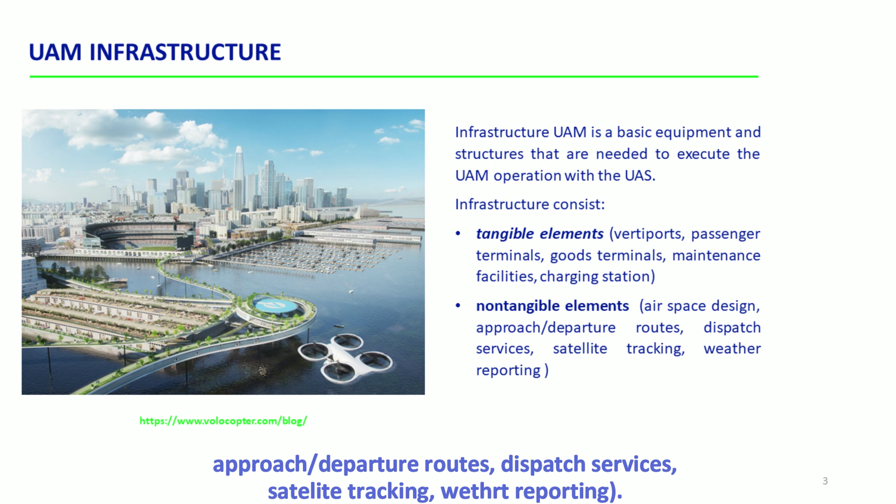A UAM operation needs infrastructure for taking off, flight, landing, servicing and preparation for the next flight. Operations to deliver goods also need infrastructure to deliver the goods. Operations to transport people also need infrastructure to facilitate the movements of these people and their luggage. The servicing of the UAS needs facilities to perform post-flight and pre-flight inspections, maintenance, and for refueling of the aircraft or for reloading the batteries of the aircraft's propulsion.

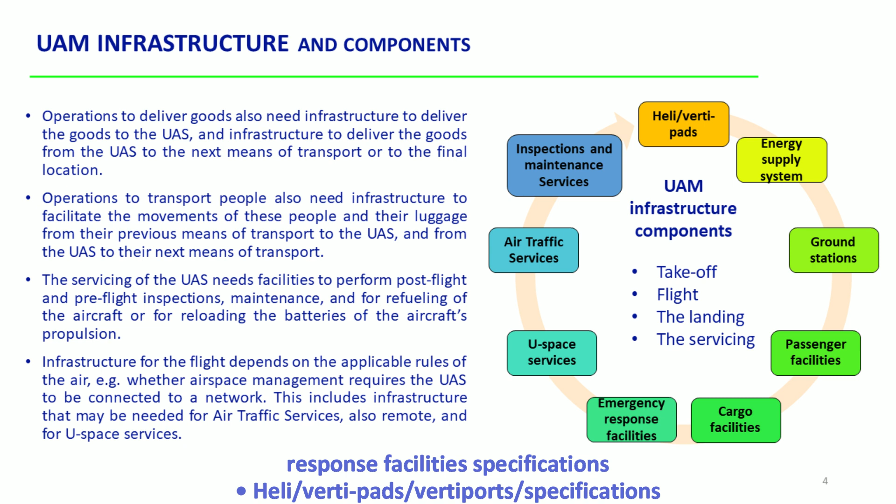Infrastructure for the flight depends on the applicable rules of the air. This includes infrastructure that may be needed for air traffic services, also remote, and for U-space services. In general, UAM infrastructure components are as follows: ground station specifications, flight specifications, UAM, UTM, U-space, ATM, passenger and emergency response facilities specifications, heli vertipads, and vertiports specifications.

The urban air mobility and its future integration into urban transportation. UAM is a novel concept based on the use of vertical takeoff and landing vehicles for aerial transportation of people in urban and peri-urban environments, but its integration into cities and within existing transportation modes needs a completely new approach. Although it will take some time for the technology to be fully in service, it is important to prepare, supporting cities with recommendations to allow UAM integration into everyday life equal to surface transport.

UAM needs to be integrated into the urban context. To do that, a series of actions will be necessary to adapt the cities and allow them to accommodate this new mode of urban air transport.

The operational limits, or barriers, to the development of UAM can be divided into three macro categories: 1. Ground infrastructural limitations - ground infrastructures necessary for passengers embarking, disembarking, and flight and landing operations. 2. Technological limitations - propulsion, capacities, covered distance, and so on. 3. Social limitations.

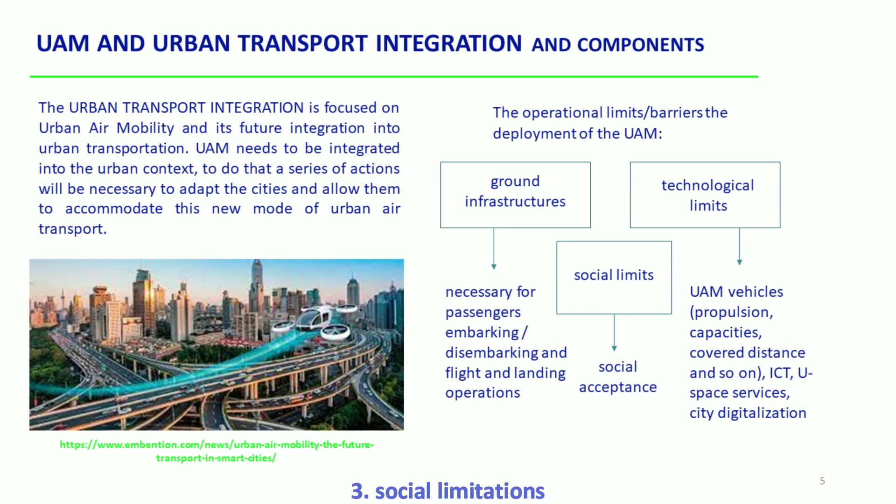Within the technological limits, in addition to the enabling vehicles, there are all aspects related to ICT and U-space services. The ICT domain-related applications that can be used to support UAM and multimodal transport include Internet of Things, communication technologies, big data processing, and the smart cities concept.

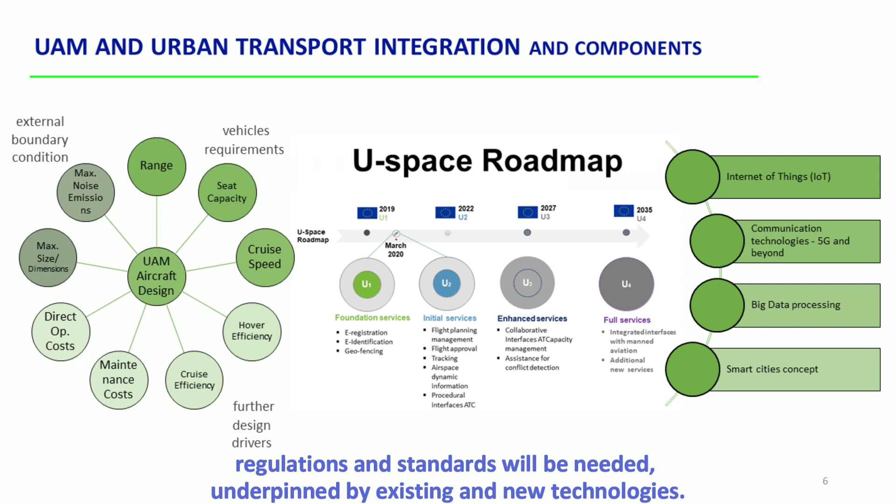Another important aspect to ensure the integration of UAM in the urban context of the city and with all existing transport modes are certainly the U-space services, which in their final phase will need the whole environment to integrate safely with manned aviation and air traffic control. As this important and growing domain evolves, new operational concepts, regulations and standards will be needed, underpinned by existing and new technologies.

Drones could significantly impact the natural environment. There are many important aspects to consider when implementing unmanned vehicles in cities. Environmental issues constitute one of the more important topics, so many possible events and undesirable effects should also be taken into account so as not to disturb the natural environment in which we live.

Wildlife protection is one of the main concerns of European citizens when considering the potential large number of aircraft flying at lower levels of the atmosphere. Many aspects are important to consider when implementing unmanned vehicles in cities: noise, impact on wildlife and birds, disruption of habitat, impact on flora, noise pollution, greenhouse gas emissions, visual pollution and energy consumption. Environmental issues constitute one of the more important topics, so many possible events and undesirable effects should also be taken into account so as not to disturb our natural environment. Urban air mobility's impact on the natural environment includes drone impact on wildlife, disruption of habitat, and impact on flora.

As regards impact on birds, we have provoking attacks, scattering, effects on birds' reproduction and survival, collision during provoking attacks, mid-air collisions, and interrupting feeding.

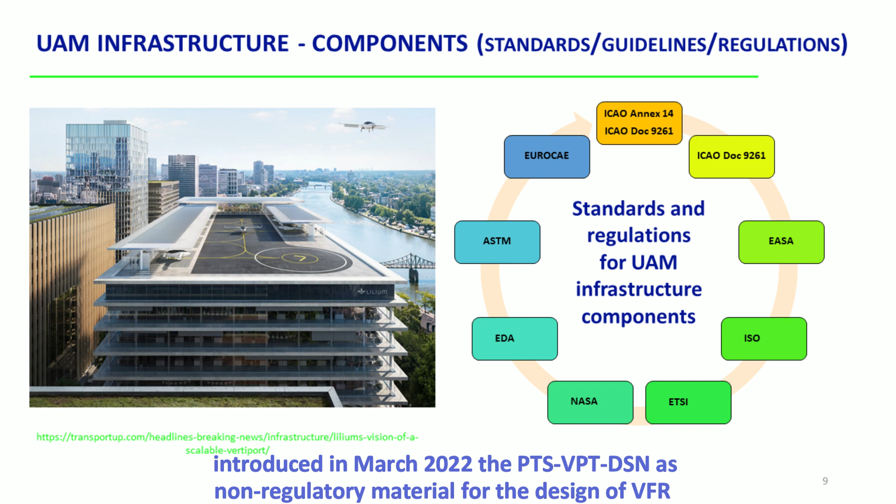The EU Aviation Safety Agency, EASA, is developing rules for UAM facilities, i.e. vertiports, in 2 stages. In the first stage, EASA introduced in March 2022 the PTS-VPT-DSN as non-regulatory material for the design of VFR vertiports or parts thereof, applicable for the operation of manned VTOL-capable aircraft certified in the enhanced category.

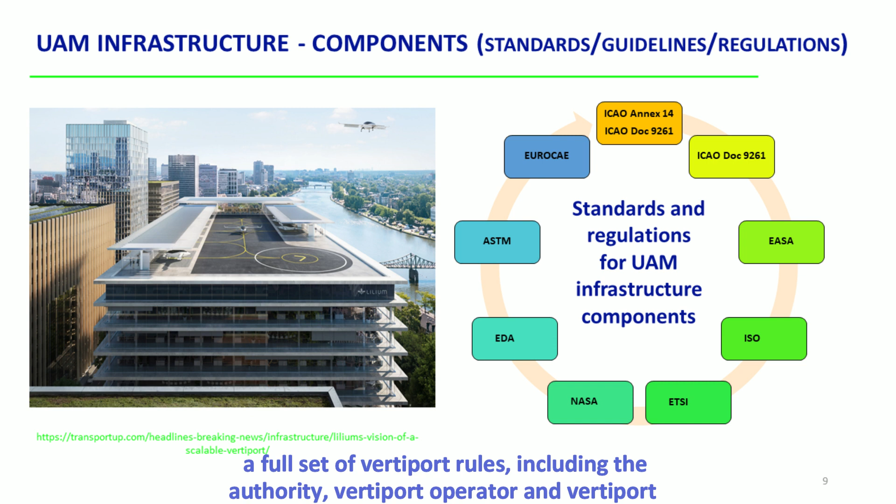In the second stage, the rules will cover a full set of vertiport rules, including the authority, vertiport operator, and vertiport operation requirements, along with the certification specifications (CSs) and guidance material (GM) for vertiport design and certification.

Heli-Vertipad's Vertiport Specifications Section 9.6 covers Refueling Safety Requirements, including fire extinguishing equipment.

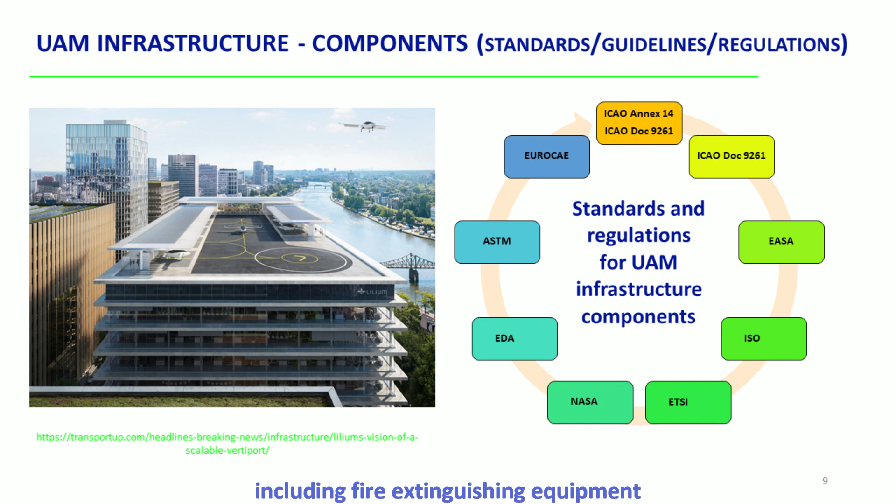Regarding UAM, UTM, USpace and ATM, the Global UTM Association released a document describing an overall high-level unmanned aircraft systems traffic management (UTM) architecture for all types of UAS operations: VLOS, EVLOS, BVLOS, piloted, RPAS, and autonomous.

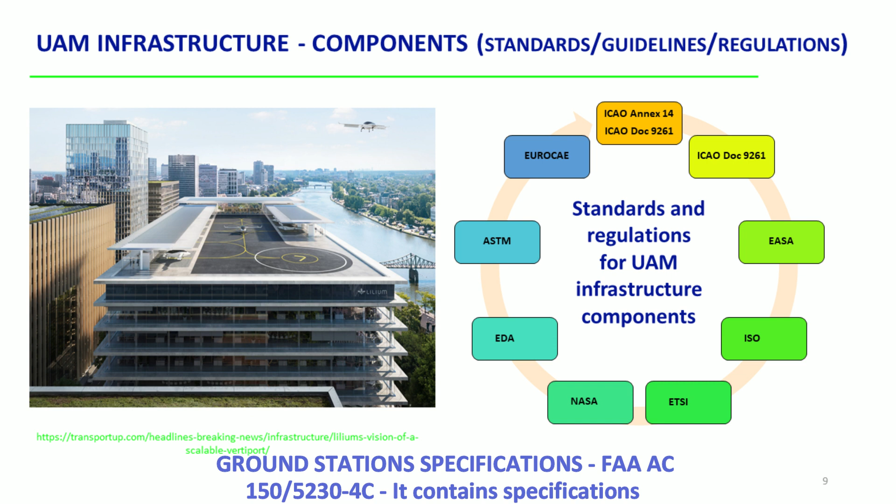Ground Station Specifications: FAA AC 150/5230-4C contains specifications and guidance for the storage, handling, and dispensing of aviation fuel on airports.

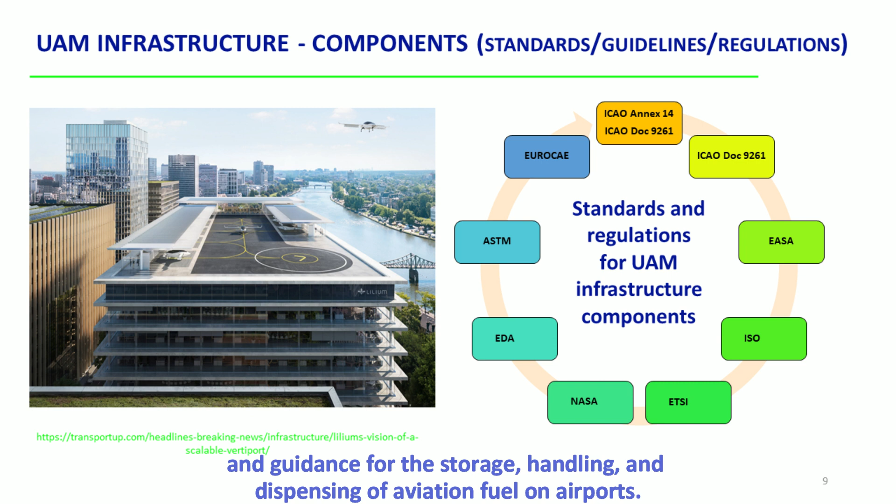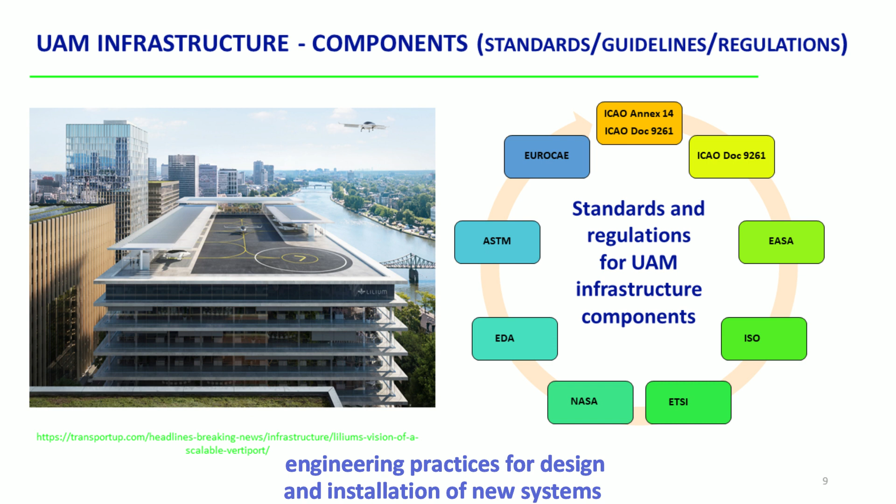Lighting Specifications: ICAO Doc 9157, Guide to the recommended electrical engineering practices for design and installation of new systems and the modification of existing systems of aerodrome fixed lighting.

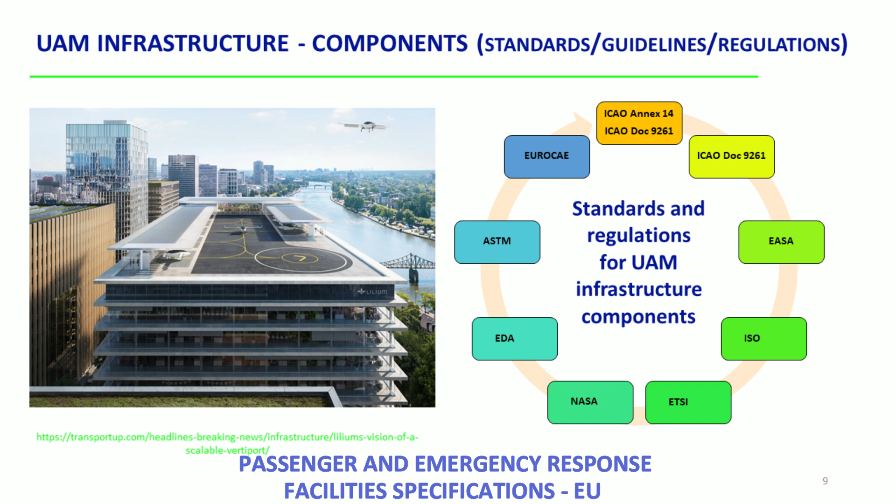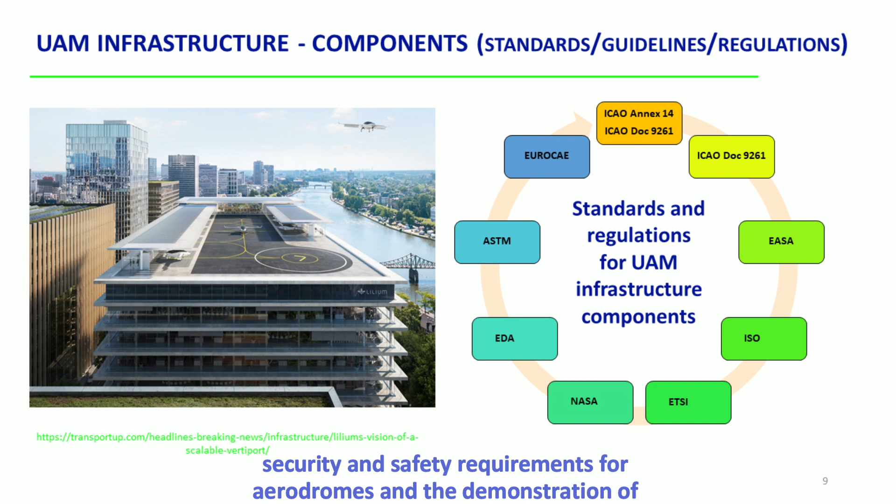Passenger and Emergency Response Facilities Specifications: EU Regulation 139/2014 on aerodromes shows the security and safety requirements for aerodromes and the demonstration of procedures to guarantee the passenger safety requirements to screen passengers.

The EU Aviation Safety Agency, EASA, is developing rules for UAM facilities, i.e. vertiports, in 2 stages. In the first stage, EASA introduced in March 2022 the PTS-VPT-DSN as non-regulatory material for the design of VFR vertiports or parts thereof, applicable for the operation of manned VTOL-capable aircraft certified in the enhanced category.

In the second stage, the rules will cover a full set of vertiport rules, including the authority, vertiport operator, and vertiport operation requirements, along with the certification specifications (CSs) and guidance material (GM) for vertiport design and certification.

Some consideration could be given to ensuring an efficient integration of UAM into existing transport systems, by way of considering data exchange standards between operators. It is essential that there is a single standard of data exchange between different transport systems and the different operators.

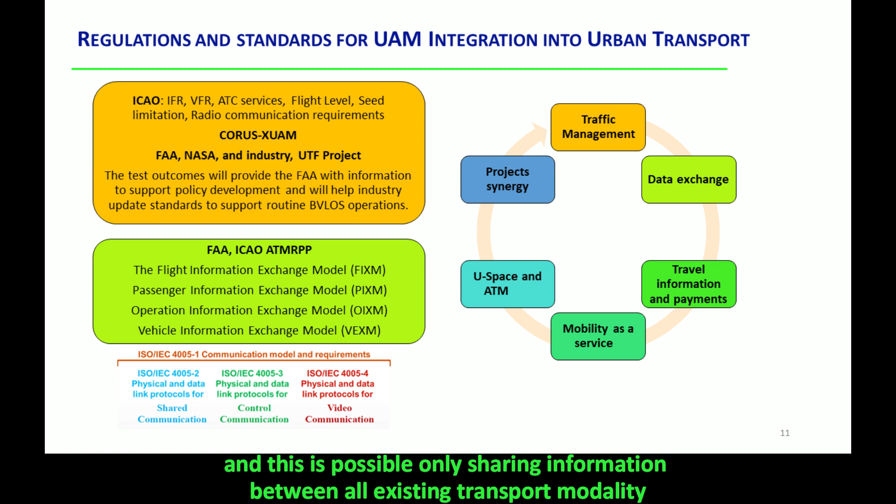Second, all information should be shared between operators and transportation service providers. Third, there should be availability of alternatives in the round trip to overcome any disruptive scenario that may arise during the journey, and this is possible only by sharing information between all existing transport modalities.

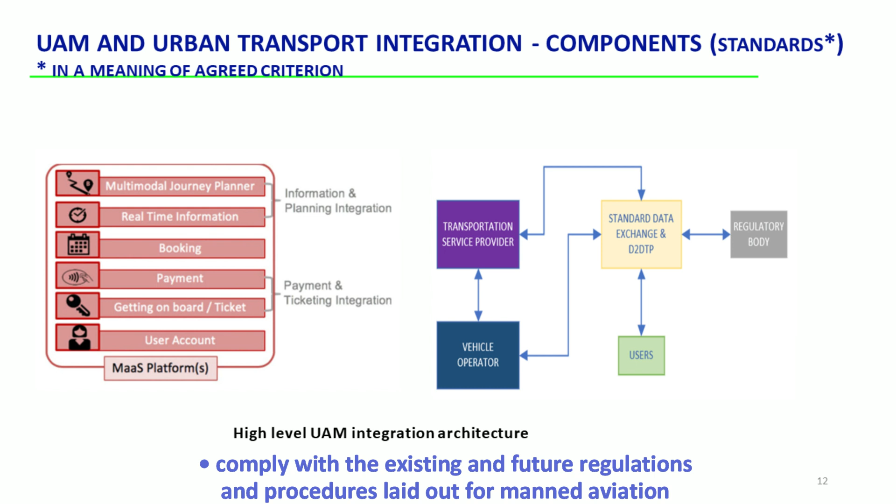ICAO has specified 4 main requirements for UAS ATM integration: it shall not imply a significant impact on current users or the airspace; it shall comply with existing and future regulations and procedures laid out for manned aviation; it shall not compromise existing aviation safety levels nor increase risk more than an equivalent increase in manned aviation would; and it shall be conducted in the same way as those of manned aircraft, and shall be seen as equivalent by ATC and other airspace users.

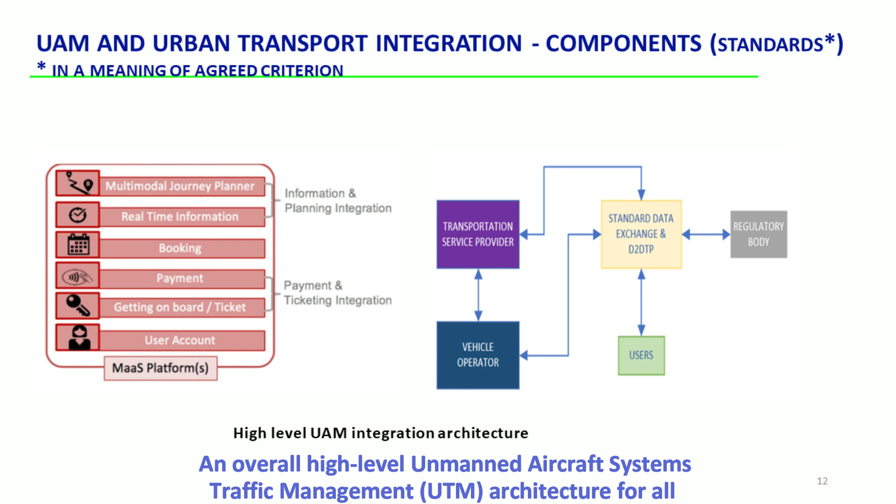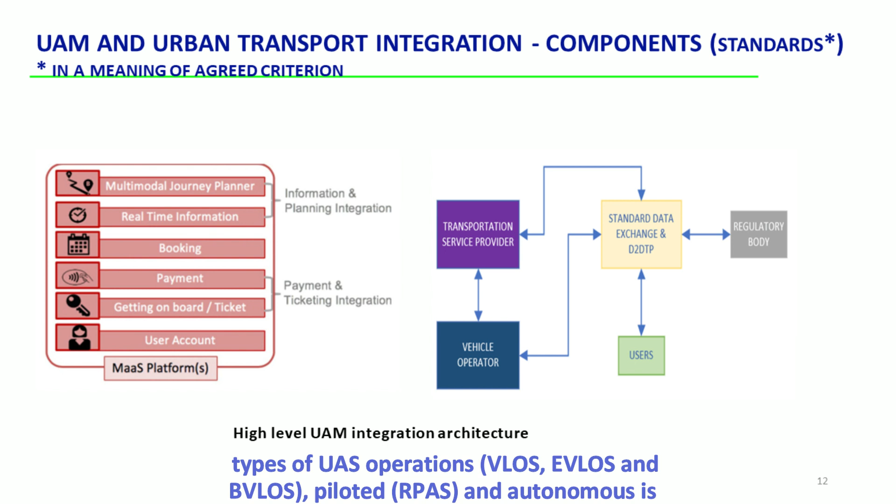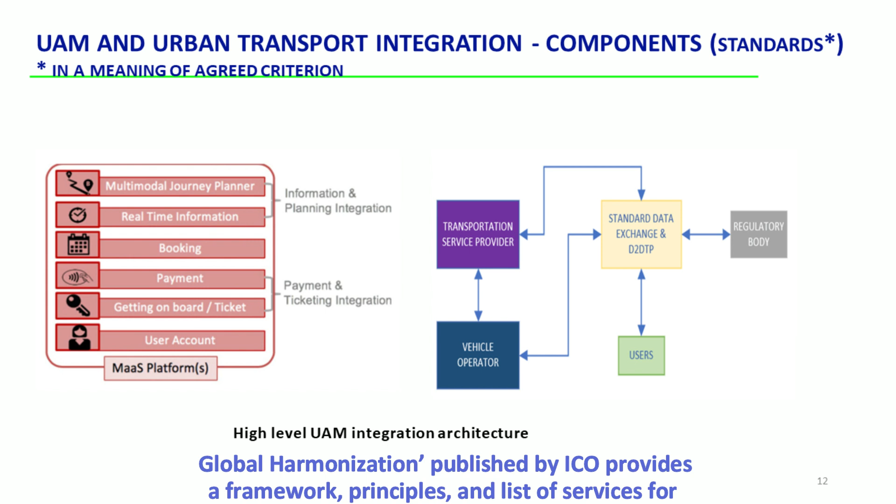An overall high-level unmanned aircraft systems traffic management (UTM) architecture for all types of UAS operations - VLOS, EVLOS, BVLOS, piloted, RPAS and autonomous - is described by the Global UTM Association (GUTMA): a common framework with core principles for global harmonization. Published by ICAO, it provides a framework, principles and list of services for a typical UTM system adopted by many member states.

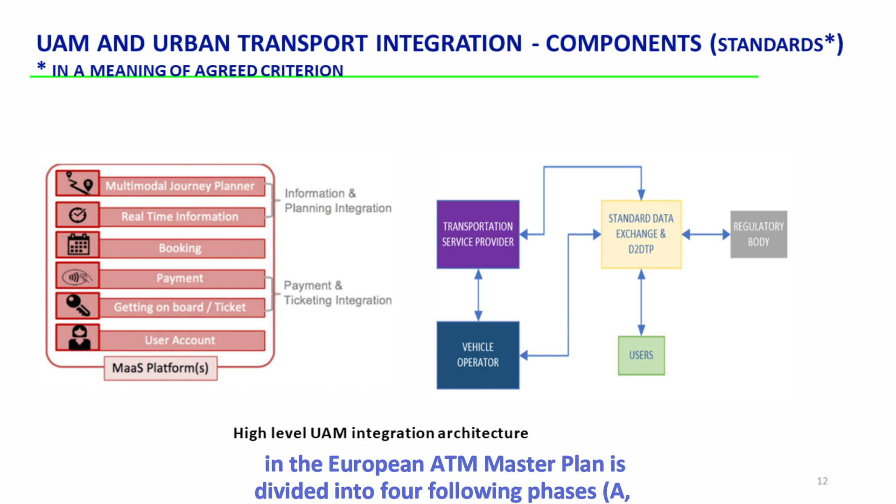The future integration of all aerial vehicles in the European ATM Master Plan is divided into 4 following phases: A, B, C, D, including digitalization, supporting infrastructure and innovation.

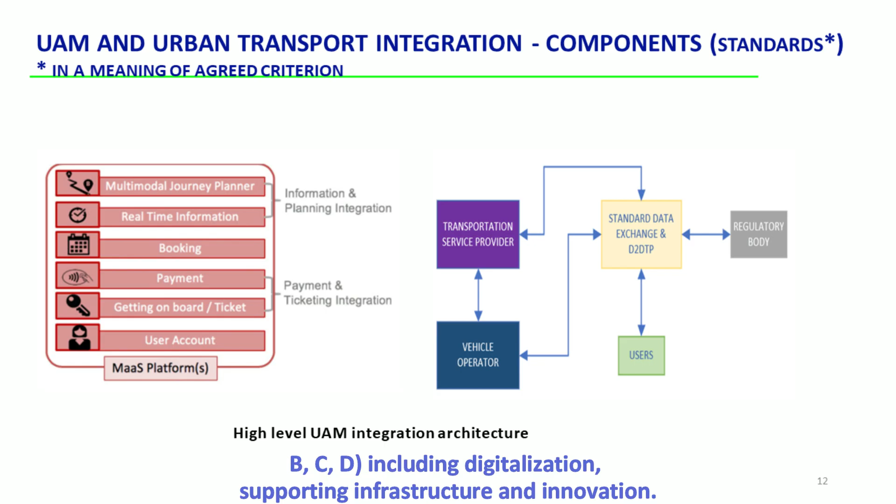Noise issues are primarily regulated by the following directives: Directive 2015/996. This directive requires member states to determine exposure to environmental noise through noise mapping by common assessment methods, and to adopt action plans based upon noise mapping results with a view to preventing and reducing environmental noise where necessary.

ETSI EN 300-753 V1.3.1 specifies acoustic noise emission limits for equipment used in telecommunication locations, to be considered when planning vertiports. Other important documents regulating this issue are FAA 14 CFR Part 150, FAA 14 CFR Part 161, FAA AC 150/5020-1, and ISO 11204:2010.

Standards for bird populations are defined by the Birds Directive. It promotes research to underpin the protection, management, and use of all species of birds covered by the directive. It shall be used in vertiport planning.

In the context of flora and fauna, under Directive 92/43/EEC, EU countries have an obligation to set appropriate protection targets and to put in place appropriate measures to ensure the population of habitats in these areas, avoid deterioration of habitats, and prevent significant species disturbance.

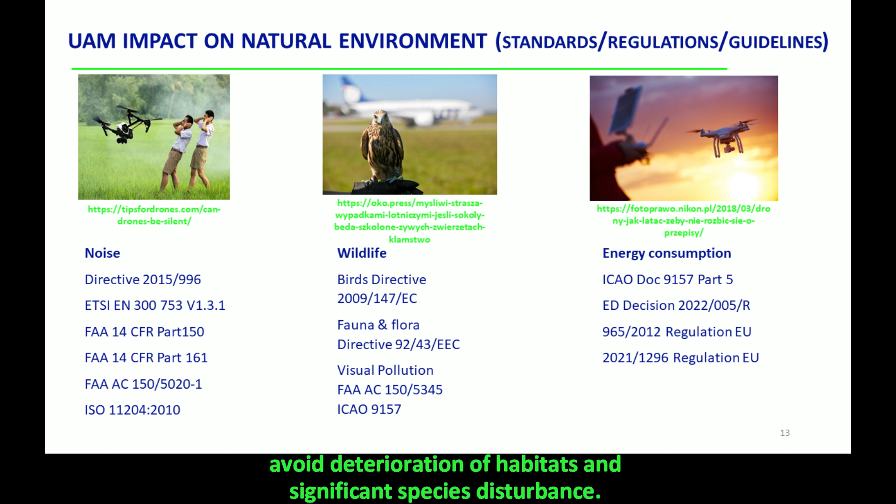Standards for visual pollution are defined by Regulation 2019-945. It establishes the general requirements for the lights with which the UAS should be equipped.

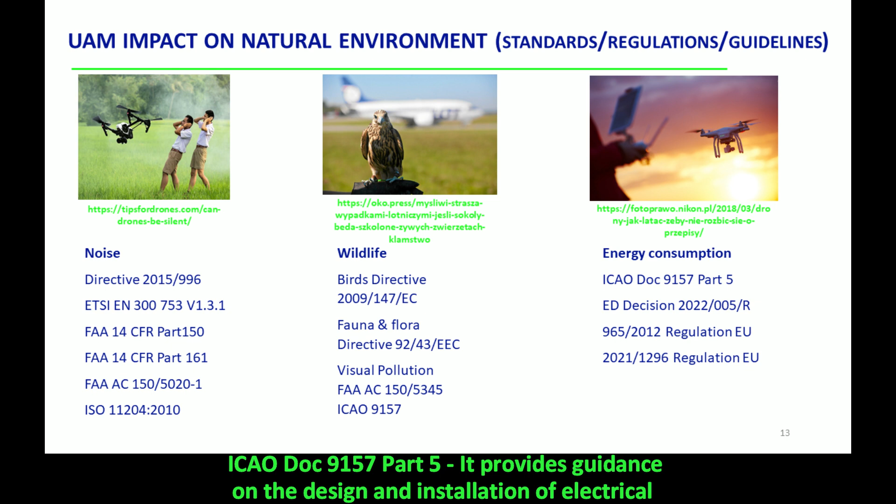Energy consumption issues are primarily regulated by the following directives: ICAO DOC 9157 Part 5. It provides guidance on the design and installation of electrical systems for aerodrome lighting.

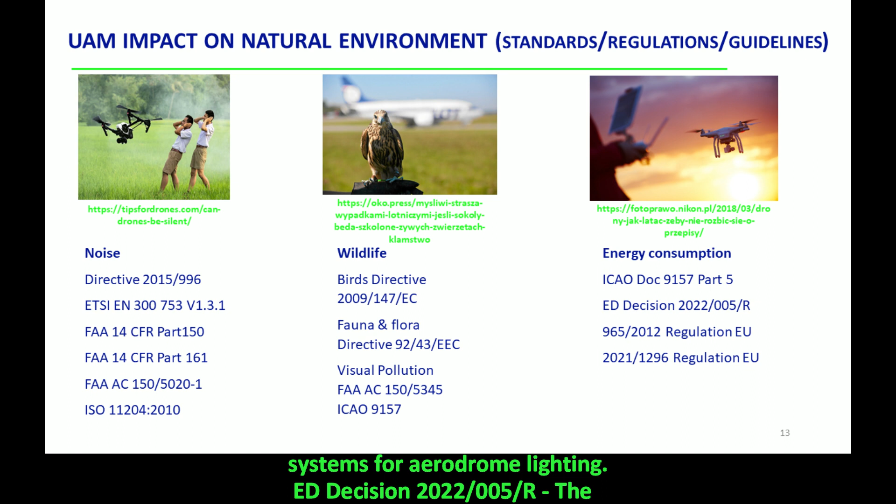ED Decision 2022-005-R. The objective of this decision is to facilitate the implementation of the new requirements on fuel energy planning and management introduced into Regulation EU number 965/2012, the Air OPS Regulation, by Commission implementing Regulation EU 2021-1296. It includes hydrogen, which can be used as a fuel for fuel cell application and other sources of energy for aircraft propulsion, such as stored electrical energy.

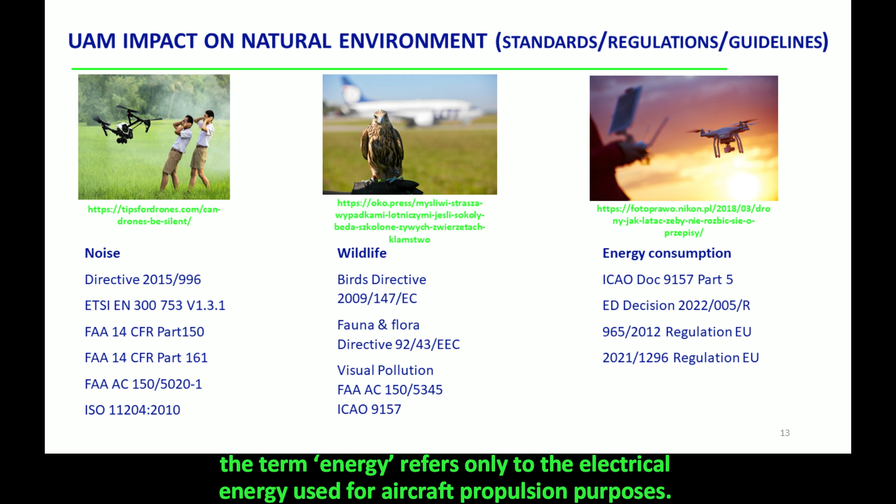This decision replaces the term fuel used in Annexes 2 to 8 with the term fuel/energy, where the term energy refers only to the electrical energy used for aircraft propulsion purposes.

Recommendations for UC 2025-1 Direct Last Mile Delivery in the context of operations address delivery of goods that are lightweight, small, compact, and do not need special conditions like temperature maintenance.

Delivery by an intermediate landing or lowering the parcel with a tether while hovering. Network of parcel share points to pick up or drop the payload, suitably accessible for the service recipient.

For UC 2025-2 Point-to-Point Public Services, operations are defined as medical transport. Blood samples, blood for donation, or human plasma are life-saving products which, in case of an emergency, need to be immediately delivered to hospitals.

Delivery by an intermediate landing, network of parcel share points to pick up or drop the payload, suitably accessible for the service recipient.

Recommendations for UC 2030-3 Advanced Last Mile Delivery. In the context of operations address operation, heavier cargo aerial services for delivery of more than one parcel at different locations, almost any cargo except dangerous goods like chemicals, deliveries over a wide area including suburbs to recipients directly or via parcel share points, network of registered landing pads to be available through the city, private landing sites, areas, and pads.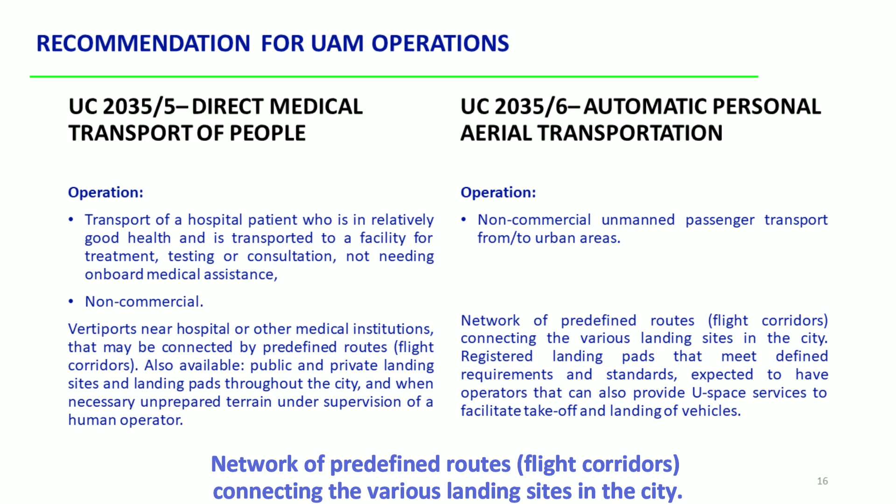For UC 2035-6, Automatic Personal Aerial Transportation, operations are defined as operation, non-commercial unmanned passenger transport from to urban areas, network of predefined routes, flight corridors connecting the various landing sites in the city.

For the effective integration of UAM components in cities, it is important that industry, international researchers and scientists, academics, as well as business sector units and organizations involved in the development of guidelines, standards and regulations engage in the preparation and implementation of regulations covering a wide range of issues.

It is an important aspect that the integration of UAM with cities' networks and operational systems is not even included in plans of municipal authorities due to the lack of relevant regulations, availability of infrastructure dedicated to the emergent mode of transport, or even the lack of knowledge about UAM deployment and societal acceptance.

Therefore, there is a need to recognize the role of the cities and regions authorities as one of the most competent in city governance and involve them in the governance of the urban airspace.

Based on thorough research and literature review, this document examined the regulation state with respect to the UAM components and has revealed that there is a need for a comprehensive approach, which will be essential to prepare the future common regulatory framework and UAM implementation, regardless of geographical area.

It should be considered that to provide UAM transportation for consumer use, there should be considered a variety of complex regulatory issues and certification challenges with social consent and acceptance.